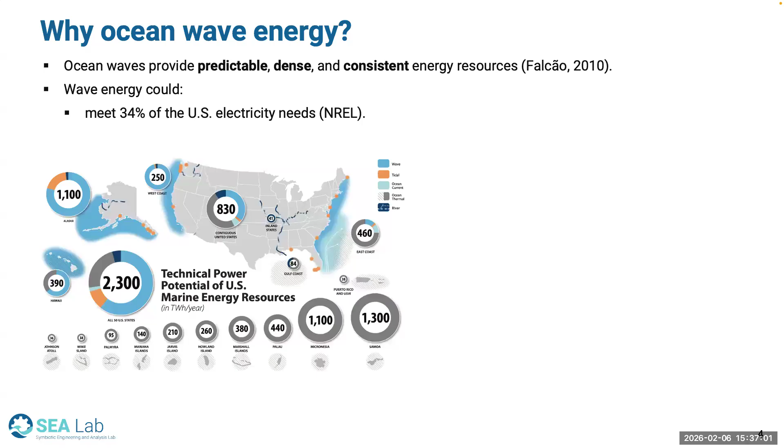What I'm showing is a map of marine energy sources, and the light blue is wave energy, but the others are also things like tidal and river current. And they can be really interesting because wave energy can provide sustainable energy for distributed energy applications, sometimes called blue economy applications. So these are things like instead of sending energy back to the grid, you might use it on site at an offshore location for things like aquaculture farms, recharging underwater vehicles, maybe even doing desalination in disaster resilience response. And so they've really been looked at in that way.

So where is ocean wave energy today? Well, the way that we extract ocean wave energy is using wave energy converters, or WECs, to extract the energy from the motion of the waves. And there's been many advancements in recent years. A company here in the United States called CalWave, they're based out in California. This is their pilot device that they tested in 2022 for 8 months, and it went flawlessly off the coast

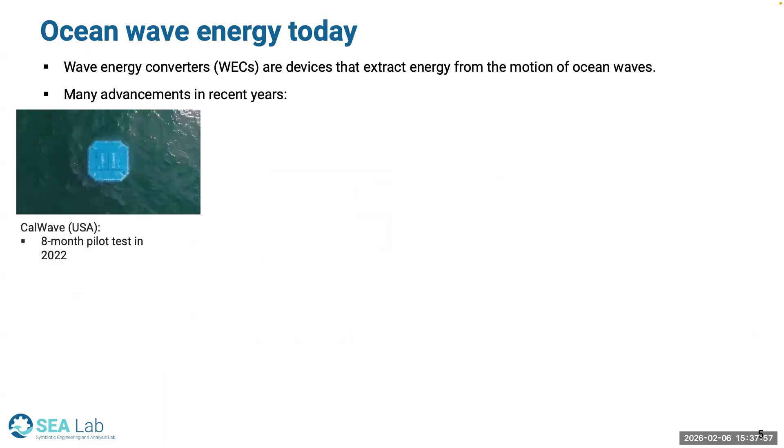of San Diego. This is a developer out in Oregon called OPT, Ocean Power Technologies. This is their pilot device that they tested for a whole year in 2019. And I believe somewhere over here, I think there's like a person. So you can see the scale of some of these devices is quite massive.

Recently opened out in Oregon is a facility called PacWave. This is an open ocean testing facility that was a collaboration with the Department of Energy in Oregon State and a lot of other entities. But the idea is it's going to be a wave energy test bed. Developers can come in, plug their devices into essentially the grid, and test how they perform out in the open ocean. It's going to be able to test up to 20 devices at 20 megawatts total, and it just opened this last year. So you're going to start seeing some of these developers out there.

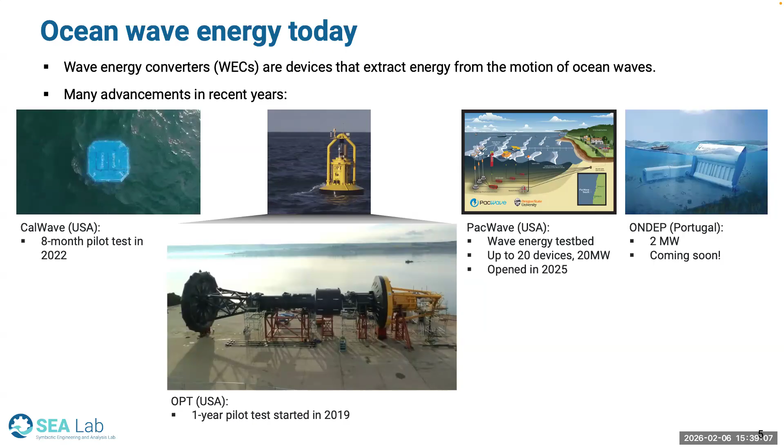As you might imagine, the EU is a little bit ahead of us. So this is a company called ONDEP that's going to actually deploy a commercial scale farm coming soon, 2 megawatt farm of wave energy converters. And then another company called CorPower in the EU, they had their full scale device tested for on the order of 4 or 5 years, and they have a 4 device array coming soon. So these systems are here, and they're really taking off, and folks are exploring all sorts of avenues.

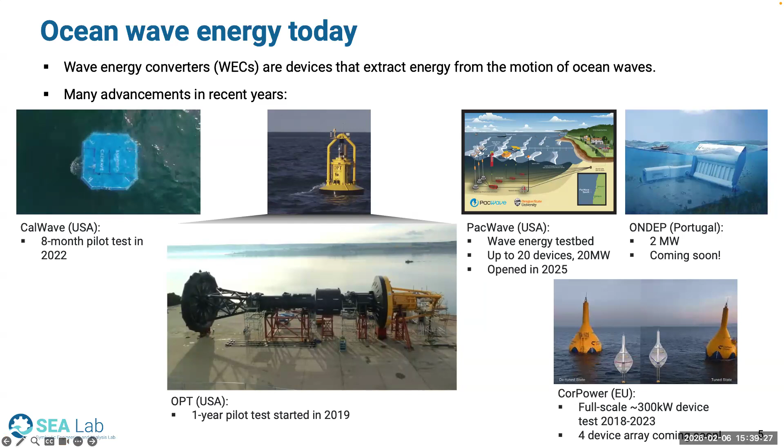But there's a lot of challenges with extracting wave energy. And one of the biggest ones is that it has a high levelized cost of energy. So what I'm showing here are 2 different types of wave energy converters. One is called the reference model 3 that moves in heave. So it extracts energy from the up and down motion that's induced from the waves. And the other is called RM5, reference model 5. It moves like a flap, so it surges when the waves hit it.

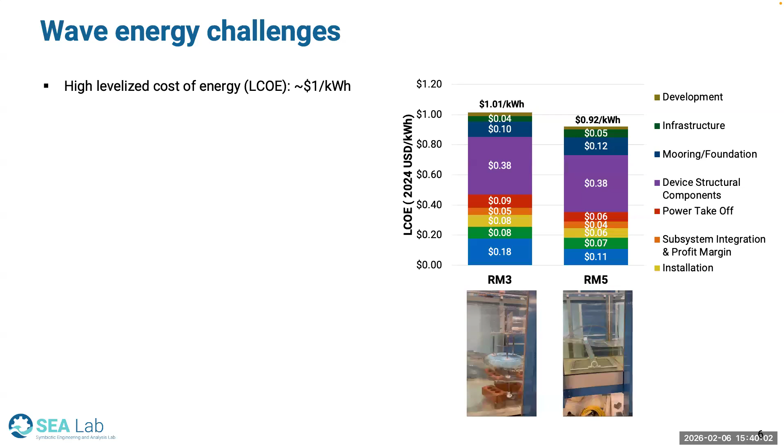And what I'm showing is data from the Department of Energy translated to 2024 dollars. And for both of these devices, their cost estimates come in at about $1 per kilowatt hour. That's extremely high when you compare it to current wind and solar prices. And I believe this also includes offshore wind, which is on the order of 4 cents per kilowatt hour. So if wave energy is ever going to be competitive for grid scale power, there needs to be a lot of cost reductions.

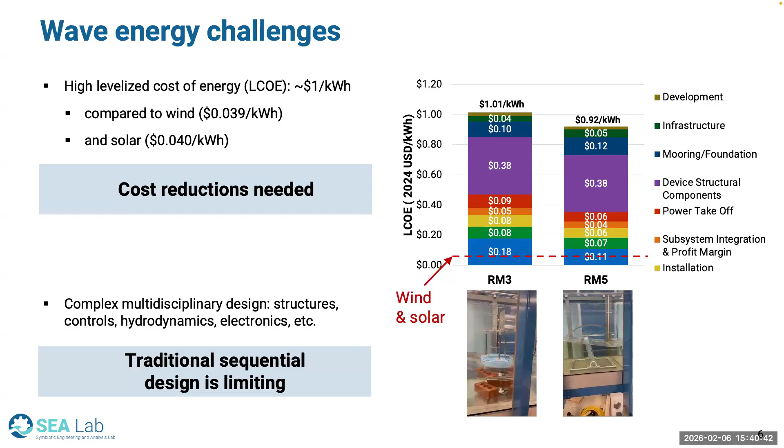What we feel in my group is that these systems are very complex, multidisciplinary design systems. They have interactions between their structures, their control system, their hydrodynamics, and their electronics. And so the traditional sequential design methods that have been used are quite limiting to unlocking their potential.

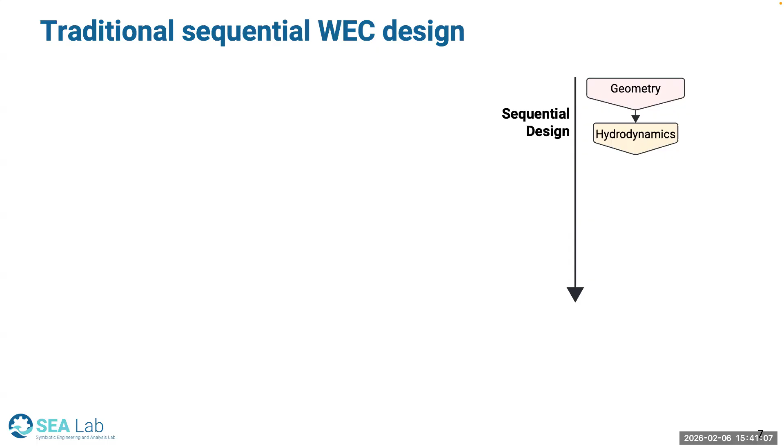If we look at traditional sequential design optimization when it comes to wave energy, usually folks start out with some kind of geometry. So for instance, they might think of a heaving point absorber or an oscillating surge WEC, come up with a general architecture. From there, they analyze the hydrodynamics. How do these devices respond to the ocean waves? Once we understand their response, we usually think about the structures. Okay, how do we design the structures and stiffen them in the appropriate way to handle these wave loads?

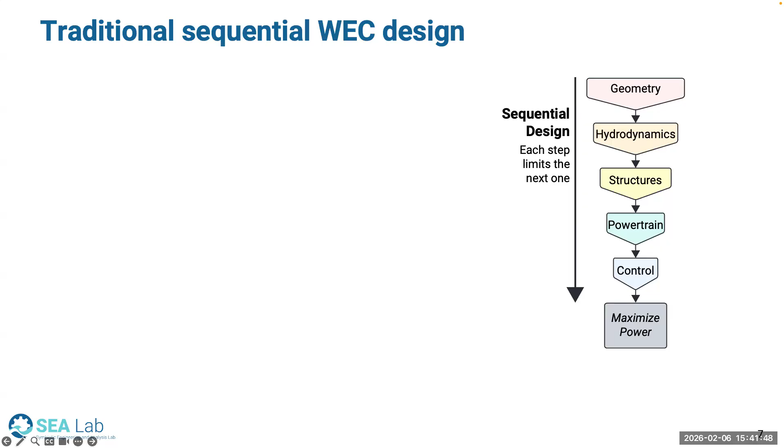And from there, once we can handle the wave loads, how do we extract energy out of them? What does that powertrain need to look like, that transmission system? And finally, control is usually an afterthought. All the way at the end, how do we tune this thing to maximize energy absorption, all with the goal of maximizing power? But what I hope you can see is that each step in this process limits the choices of future disciplines. So your choice of geometry locks you in to some assumptions you have to make about how your device behaves in the waves and its hydrodynamics. From there, you're locked in further into the structures and so on and so forth.

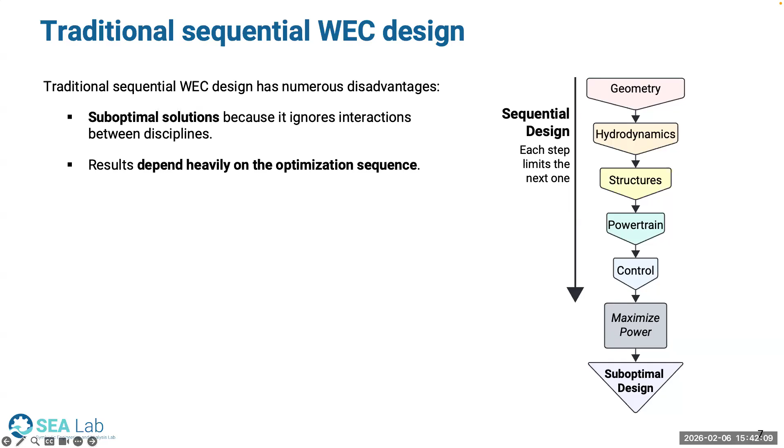So this is why traditional sequential design optimization for wave energy converters has a number of disadvantages. You often lead to suboptimal solutions because you ignore interactions that occur between these disciplines. And the results depend heavily on the optimization sequence. If I had started with another discipline, I will probably get out a different result.

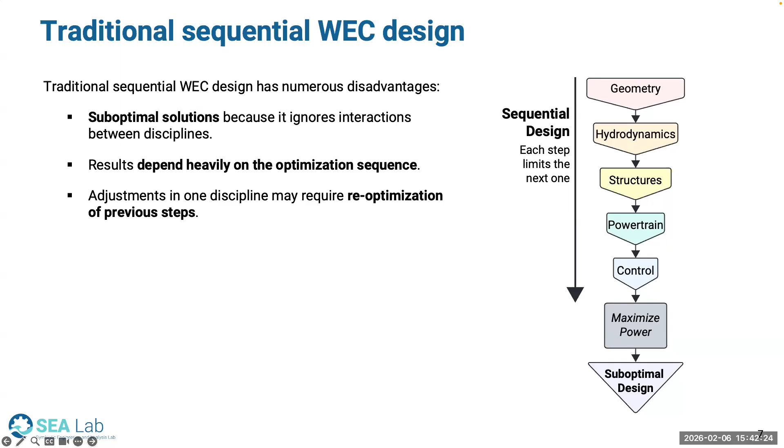And adjustments in one discipline often require re-optimization of previous steps. So it can be very time consuming. This is very challenging for wave energy converters because they're inherently coupled systems. So I'm showing here a simple wave energy converter that can move in heave, so it can move up and down. And it's got some sort of power takeoff system that will convert its motion into something usable like electricity.

If we assume linear potential flow, you can model a wave energy converter very much like a mass spring damper system, where you've got its body acceleration, velocity, and position. And on the right, you have the excitation force of the waves hitting the device that's causing this motion. So the components that go into this when you model it are the mass of the wave energy converter and something called the added mass. This is due to the inertia of the water moving with the wave energy converter.

You also have damping in the system. Some of it is due to the energy radiated as the wave energy converter bobs up and down. It's going to radiate waves. And some of it's due to the powertrain, your PTO damping, usually set by your controller. And there's some amount of stiffness in the system, some amount of hydrostatic stiffness that's due to the general buoyancy of your system that restores it, as well as your controller.

If I color code these, I can color code some of them as red that are related to the geometry and the structures of the device, and some of them as blue that are related to the powertrain and controls of the device. So I already see that these two disciplines are interacting just with a simplified governing equation of the system.

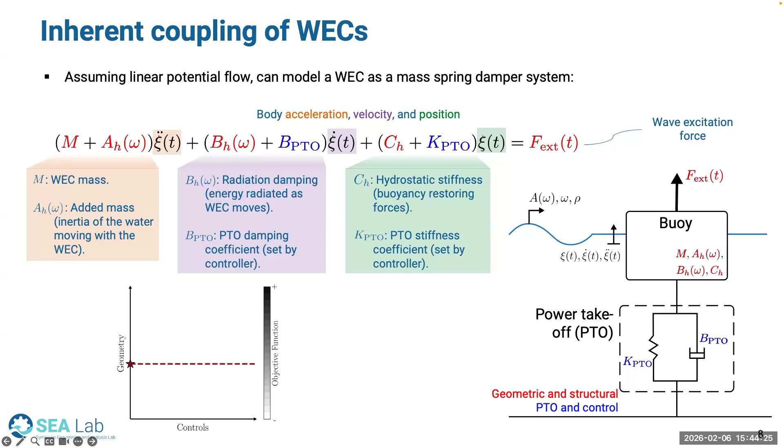Another way to think about it is if I'm looking at the design space of all possible choices in my geometry and all possible choices of my control system, if I optimize the geometry, maybe I might operate in some region here. And then operating on that line, I have to pick a controller to maximize my power. So maybe that looks something like this. And this solution that I achieve at this intersection is actually likely suboptimal.

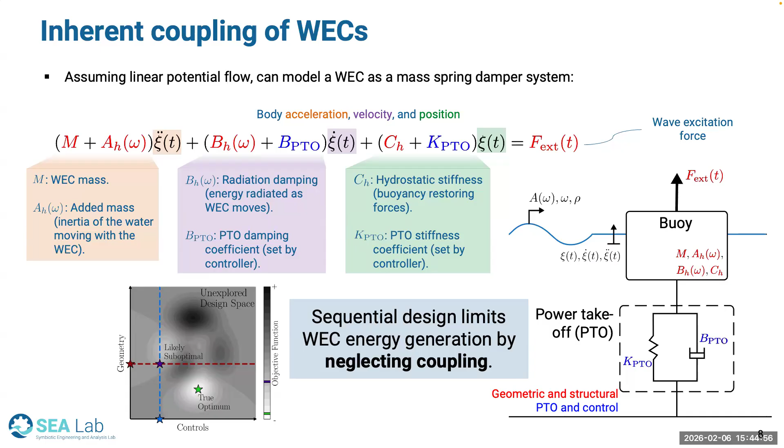If I look at the full design space, here I'm plotting contours of minimizing an objective and maximizing an objective, you can see I've entirely missed this true optimum because I couldn't explore the full design space. So the sequential design that has often been done for wave energy converters really limits its potential due to this neglecting of coupling. And there's coupling in many different disciplines within wave energy converters.

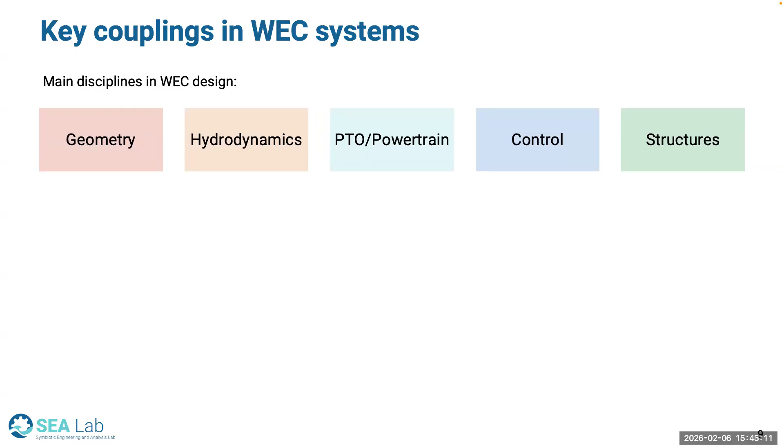Generally, the main disciplines in a wave energy converter are its geometry, its hydrodynamics, its PTO or powertrain, its control, and its structures. Often there's coupling between the hydrodynamics and the PTO. So the hydrodynamic response influences the PTO's ability to extract energy efficiently. And at the same time, the PTO will induce forces on the wave energy converter, impacting its wave radiation.

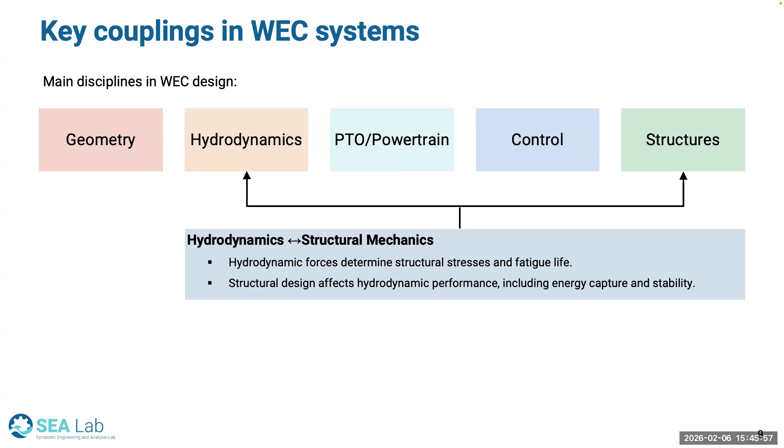You'll have coupling between the control system and the PTO and the hydrodynamics. So your control strategies adjust your PTO settings based on wave conditions, and the control inherently affects the WEC motion and consequently its hydrodynamic and PTO interactions. There's interactions between the hydrodynamics and the structures. So the hydrodynamic forces will determine the structural stresses and fatigue life of your system. And the structural design affects your hydrodynamic performance, including your energy capture and stability.

And finally, the PTO and the structures are very coupled because the PTO generates forces on your structure that you have to be able to handle. But at the same time, the structural compliance of your system may influence the PTO efficiency and its ability to extract energy.

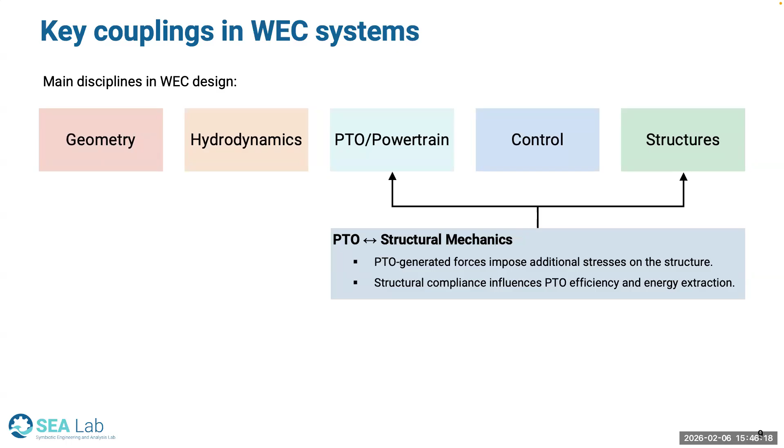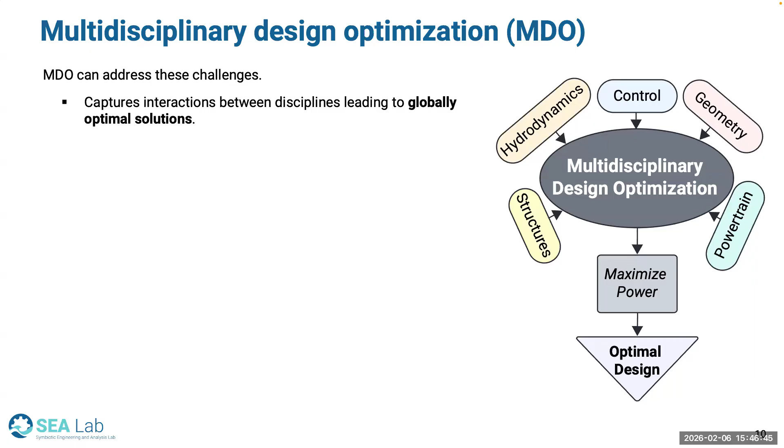We believe in my group that multidisciplinary design optimization can help address these challenges, because the idea with MDO is that it captures the interactions between disciplines simultaneously, leading to eventually globally optimal solutions. So we look at all the disciplines at once with some overarching objective, in this case, maximizing power. And the idea is by considering them simultaneously, we can get to that globally optimal solution. And this simultaneous optimization reduces the need, therefore, of iterative adjustments.

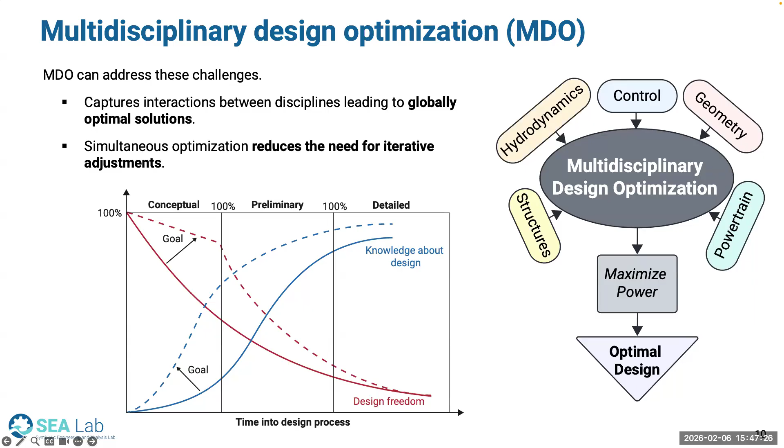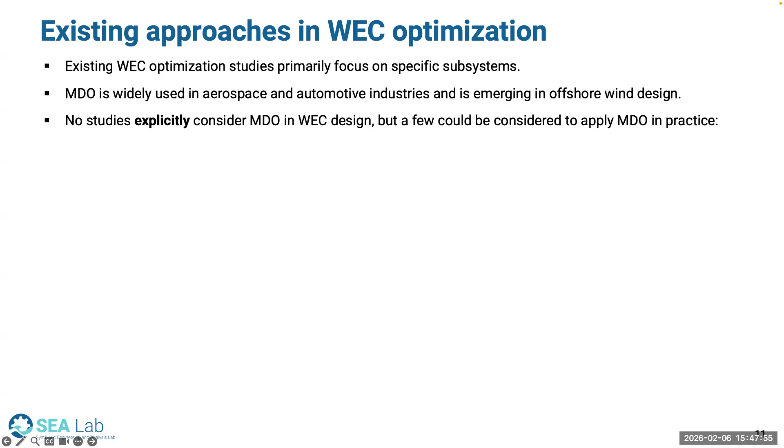There's been work already looking at optimization for wave energy converters. I'm going to highlight some studies. Most of them have primarily focused on specific subsystems, but more recently, people are considering more and more subsystems together. And in general, MDO is used widely in aerospace and automotive industries and is taking off in offshore wind design. And so these studies, they don't explicitly consider MDO, but I see what they do as being MDO in practice.

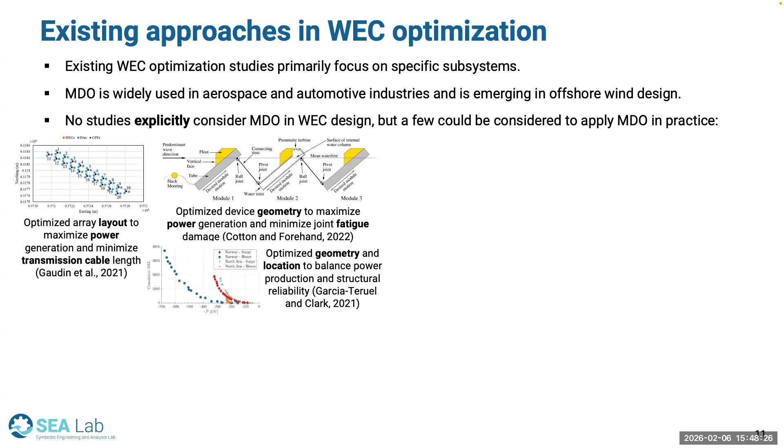So one example was a study that tried to optimize the layout of an array of wave energy converters to maximize power and minimize transmission cable length. So they had disciplines of the location of the devices, they had the transmission cable, and they had power. Another couple ones looked at optimizing device geometry to maximize power and minimize joint fatigue. So structures and geometry were involved, or optimizing geometry and location to balance power production and structural reliability. So again, structures, geometry come into play.

And more recently, there's been a lot of work in a space called control co-design, a subset of MDO, where folks have been trying to co-optimize the geometry and controls to maximize power, co-optimize the PTO controls to maximize electric power, to optimize a flap geometry, its PTO and controls, all to maximize power. So this space of control co-design is really picking up in wave energy.

But all of these studies use non-differentiable, computationally intensive numerical models for their hydrodynamics modeling. And therefore, they end up doing parameter sweeps for optimization, so brute force optimization, because they can't do gradient-based methods, or they use heuristic optimization techniques, which really limits rapid design iteration.

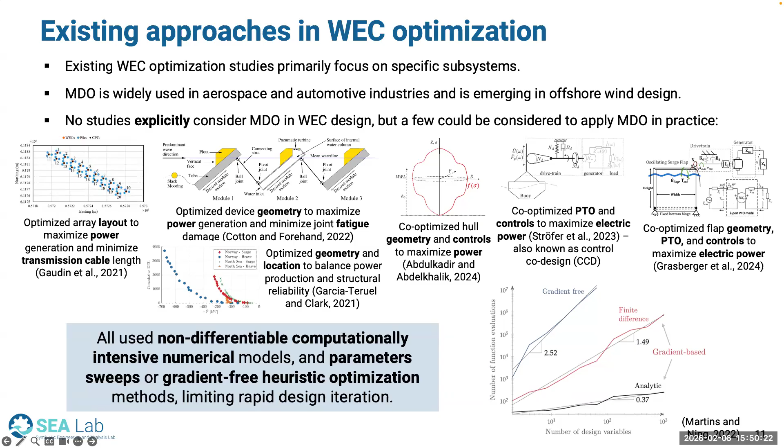So if we're going to look at wave energy converter design in a complex sense, we really need to be in the space where we can be leveraging analytic gradient-based methods for optimization. Otherwise, we're going to be limited in the complexity of our problems. What we found specifically is that hydrodynamics has been the bottleneck for the most part in a lot of these models. So let's talk a little bit about hydrodynamics modeling.

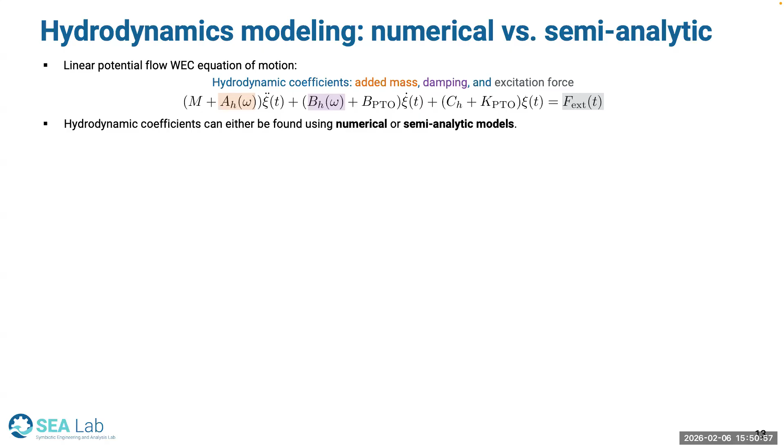So here's that governing equation I mentioned again. And what I've highlighted are what we call the hydrodynamic coefficients. These are the added mass, the damping, and the excitation force on the wave energy converter. There's a couple of different ways that you could compute these. They can either be found numerically or with semi-analytic methods. You can also use CFD, but that's a lot more computationally intensive, so I won't mention that here.

One of the most common numerical methods is the boundary element method, and it solves the problem in the frequency domain. It's faster than CFD and works for any geometry, but it's still computationally challenging and not analytically differentiable. And that's why folks, when they've used it, they've paired it with intensive gradient-free and heuristic methods for optimization.

On the other hand, there are semi-analytic methods. One example is the matched eigenfunction method that we've been expanding in my group. It matches boundary conditions at the interface of fluid domains around the body. And so it's very computationally efficient and analytically differentiable, but it only works for cylindrical geometries right now, and it can't handle wave energy converter arrays. So it requires considerable simplification of geometries and problems if you're going to use it.

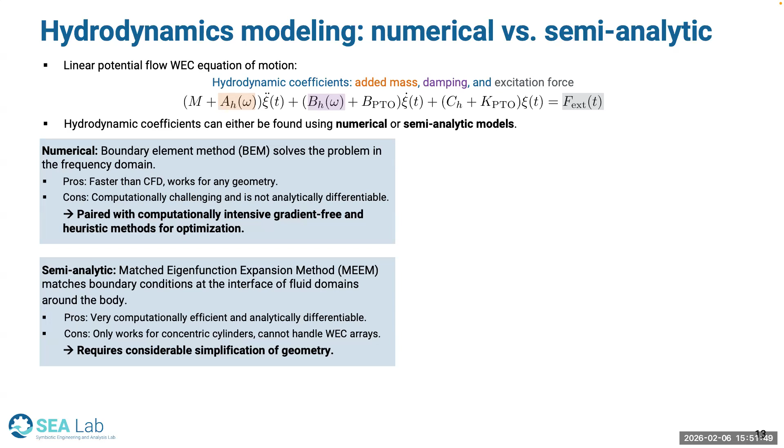But just to highlight how vast the difference is, if I were to do the same hydrodynamic model using these two methods, my semi-analytic method versus my numerical solver, I can get 30 times speed up with my semi-analytic method. So if I can simplify my geometry, that's the way to go.

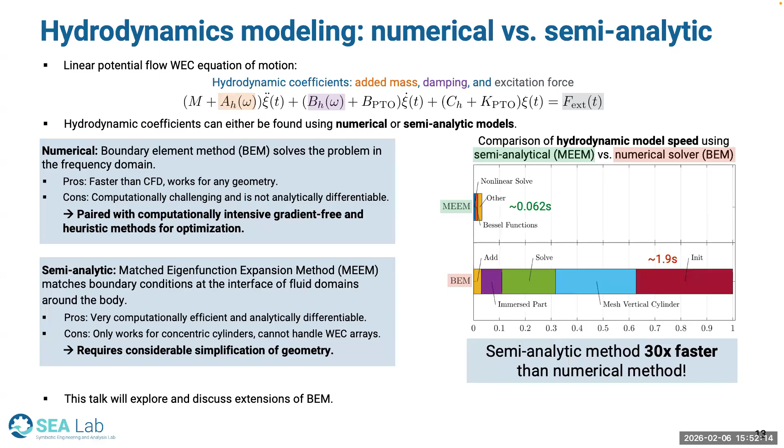What I'm going to focus on in this talk is the boundary element methods that we've been working on that allow us to work with more generalizable geometries. So how is hydrodynamic modeling done in boundary element methods? I'll give you a very quick primer. Instead of solving equations everywhere in the fluid volume, like CFD methods do, boundary element methods only consider them on the boundary. They say it's really just the boundary that has interactions with the waves, so let's see if we can focus on that.

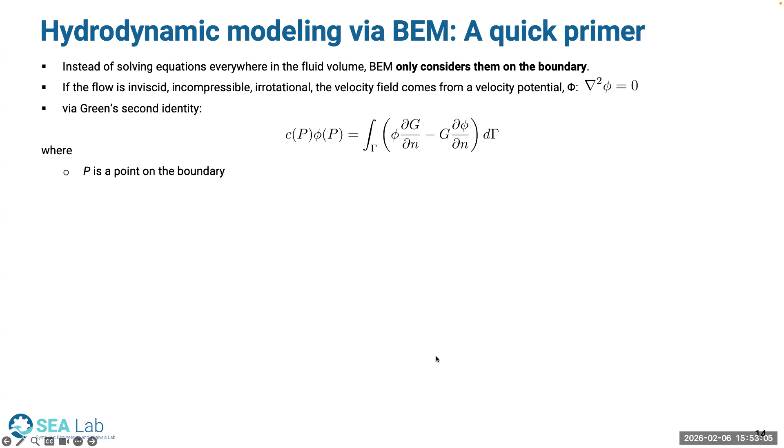And if a flow is inviscid, incompressible, and irrotational, you can simplify things quite a bit because the velocity field comes from a velocity potential. So phi can be written with the Laplace equation it satisfies. And with Green's second identity, we come up with this equation in boundary element methods, where P is some point on the boundary that I'm interested in. C of P depends on the boundary. It's usually 1/2 for smooth geometries.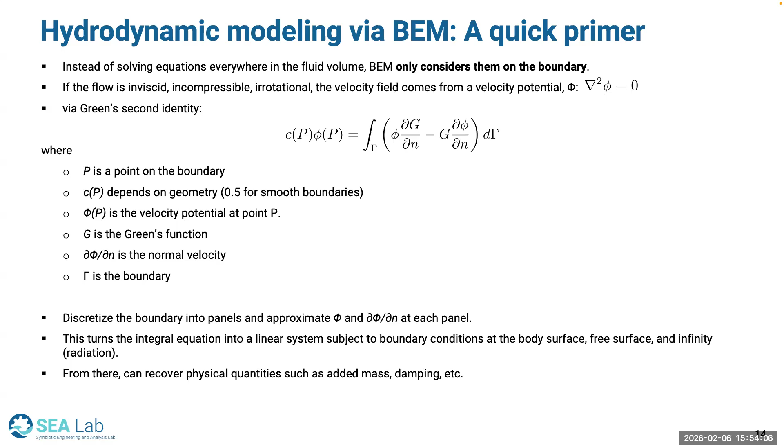And so they're really powerful because they basically transform the 3D problem through the whole domain into a 2D problem along the boundary. And in particular, to solve this integral equation, they come up with complex-valued matrices that are defined throughout the boundary.

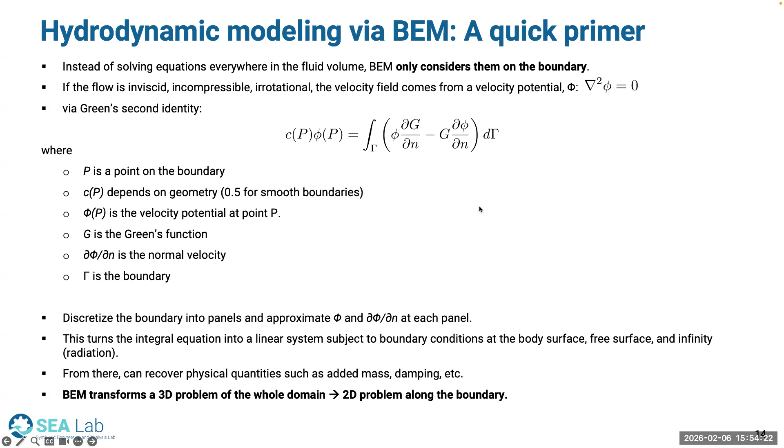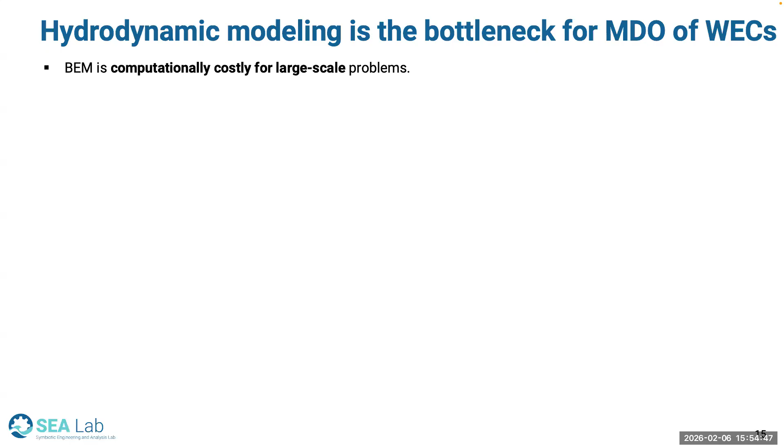So as I mentioned, we found that hydrodynamic modeling is the bottleneck for MDO in wave energy converters. And that's because even though BEM is fast, it's still computationally costly for large scale problems. I mentioned we have to discretize the boundary, so we have some amount of meshing that goes into there. So we have to solve phi at all of those panels.

And when you think about design optimization, you have to run your simulation hundreds or thousands of times. So if I have a simulation model here, some design vectors and some objectives and constraints, my optimization algorithm will wrap around that. So the faster my simulation is, the better chance that I'm going to be successful in optimization.

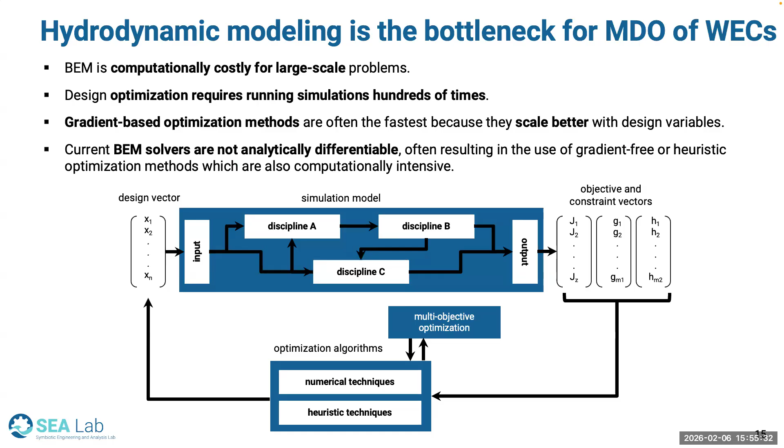Gradient-based optimization methods are often the fastest, as we saw, because they scale better with design variables. But current boundary element method solvers are not analytically differentiable. So it means you can't take analytic gradients and then leverage gradient-based optimization. And folks have either used gradient-free or heuristic optimization, which is computationally intensive.

You could potentially do differentiable programming with existing boundary element solvers by leveraging finite differences. But finite differences can suffer from inefficiencies and truncation errors. So if we were to approximate, let's say, d phi dx, where x is a design variable, using a finite difference, we have to compute phi ahead and behind of some small perturbation h in each input variable.

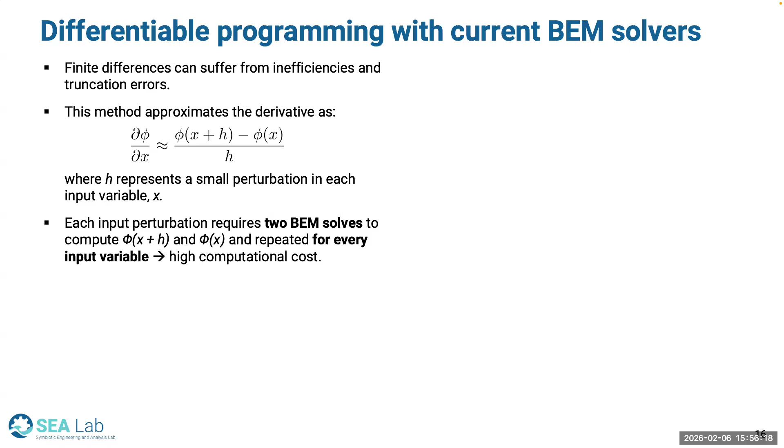And so each input perturbation requires 2 boundary element solves, which is already computationally intensive for large problems. And I have to repeat this for every single input variable x, so every design variable that I care about. So it really scales very poorly computationally.

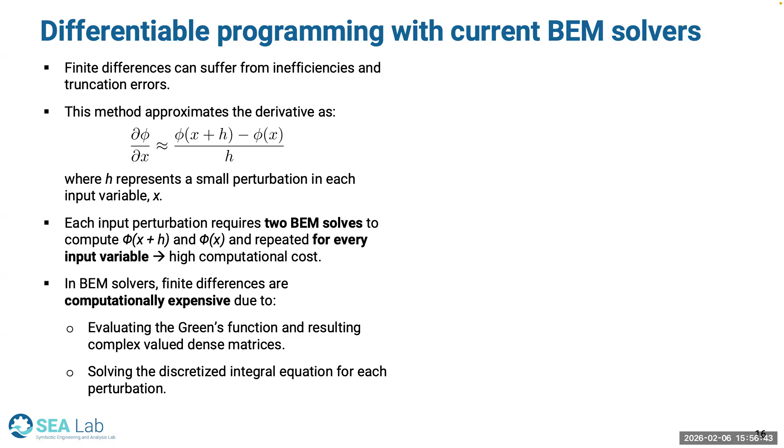And therefore, these finite differences are expensive because every time you solve a boundary element instance, you have to evaluate the Green's function and that integral that I showed before, which has complex-valued dense matrices. And then I have to solve it for each perturbation, every single optimization that I go for. And again, even if I am using finite differences, they don't scale nearly as well as analytical methods.

So that was really the goal in the work that we took on with Sandia: can we create an analytically differentiable boundary element method to solve this hydrodynamics bottleneck?

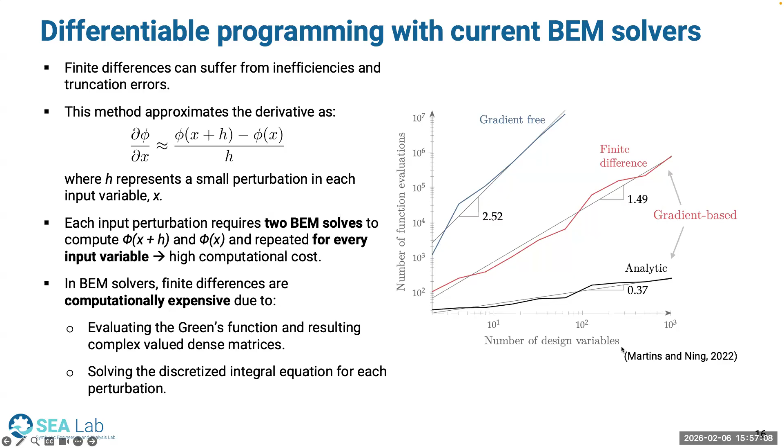It computes those matrices that I mentioned, those complex valued matrices related to the Green's function. It can either use the direct or indirect method for boundary element methods. And it implements both an exact and a surrogate Green's function expression. So there are ways to approximate the Green's function, and you can speed things up a little bit. And we've shown that that still works well for optimization, even as an approximation.

It's 100% in Julia, and that's what really allows us to do this kind of differentiable optimization, because we leverage a lot of the differentiable capabilities in Julia. And we implement the adjoint with automatic differentiation for this.

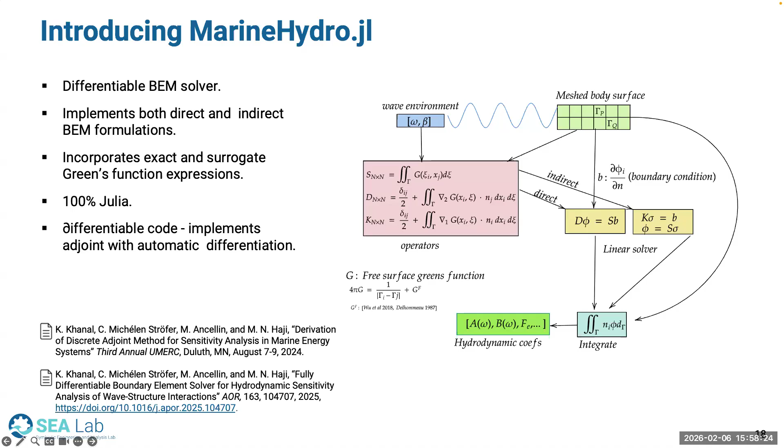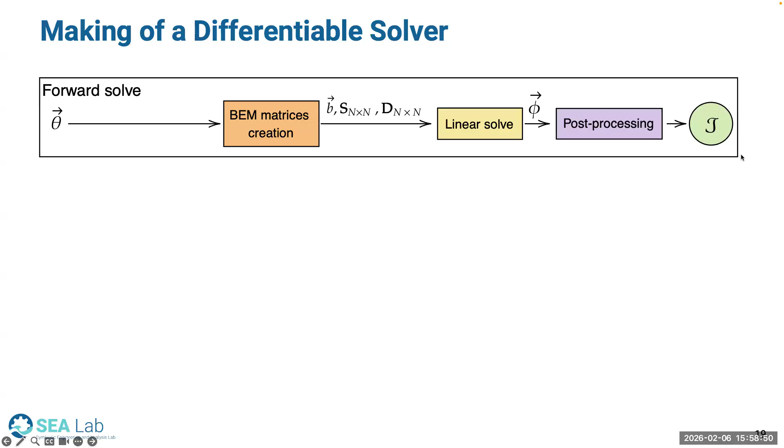But to give you a little bit of a look at how it works under the hood, let's say you've got some design variables that you're interested in, theta. You can input those along with your geometry into the solver. It will compute those complex valued matrices, compute a linear solve, and get your potential. And through post-processing, you can get some sort of objective that you're interested in. So that doesn't work any different than current boundary element methods.

But what really allows us to do more is that every time you assemble these boundary element matrices, we also leverage automatic differentiation so that we can instantly build up a map of these functions and get their sensitivities. We also leverage the adjoint, which I'll talk about in detail in a little bit, to get more of those sensitivities. And that allows you to get the gradients that you care about with respect to those design variables for any objective function.

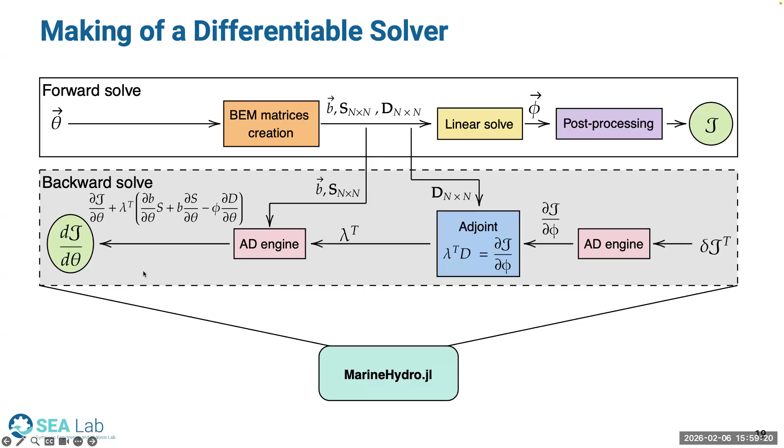So how do we do that? Let's say you have a scalar objective that you care about, like maximizing power in the case of wave energy converters. And it's a function of your potential phi as well as some design variables that you have, theta. It's subject to a constraint.

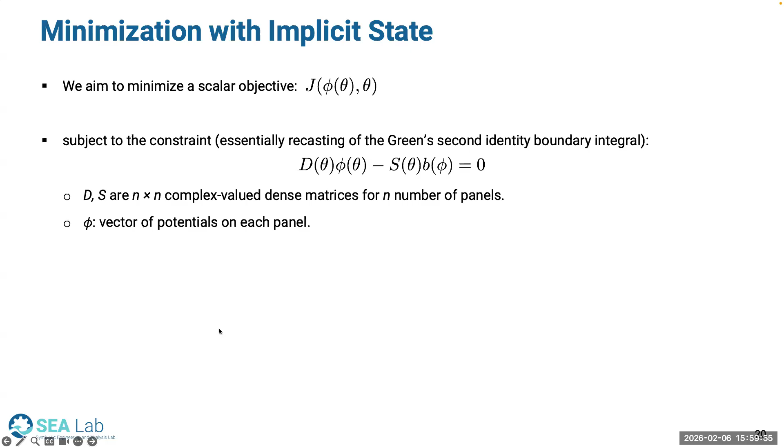So this is essentially recasting that Green's second identity integral I showed, where D and S are complex valued matrices defined at n number of panels. Phi is the vector of potentials on each panel, theta are my design variables, B is just my normal velocity, and J is my objective.

If I were to compute the total derivative of J with respect to theta, I would need to compute this: partial J partial theta, plus partial J partial phi times partial phi partial theta. And it's this partial phi partial theta that's really challenging. This is because theta are my design variables and phi are the potentials at my panels. So it's only defined implicitly via the constraint.

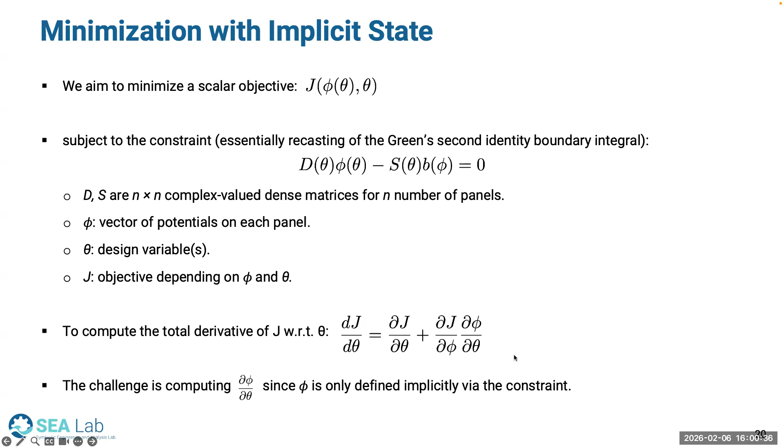And I don't want to compute this if I don't have to, because I have to compute it for every panel, for every design variable. I really don't want to do that. So we can differentiate the constraint applying the product rule. And if I were to rearrange to solve for d phi d theta, I would have to solve this for every single theta on every single panel. And that's computationally expensive. We want to avoid that if we can.

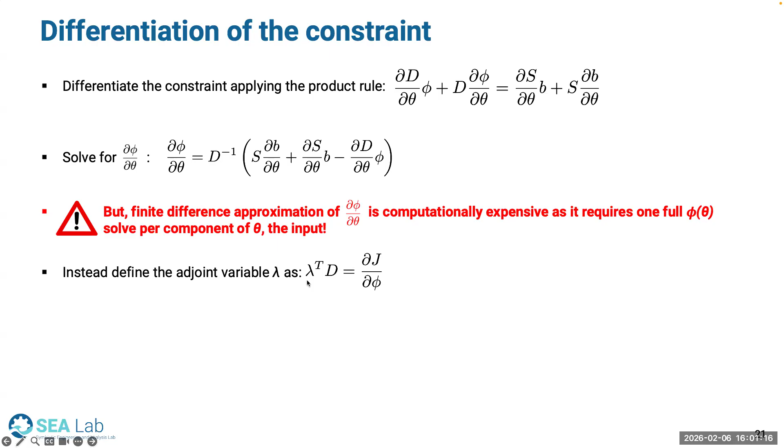So instead, we define something called the adjoint variable. And this is done a lot in aerospace optimization. So lambda is defined by this equation where lambda transpose times that matrix D equals dJ d phi. I can rearrange some things and combine it with the previous equation. And eventually, I can write the total derivative of J with respect to that adjoint variable lambda. And I don't have to compute d phi d theta at all. And that's what I wanted to get away from doing.

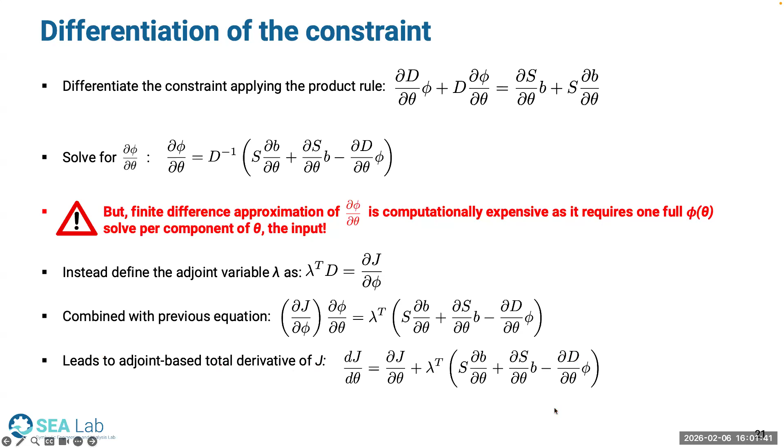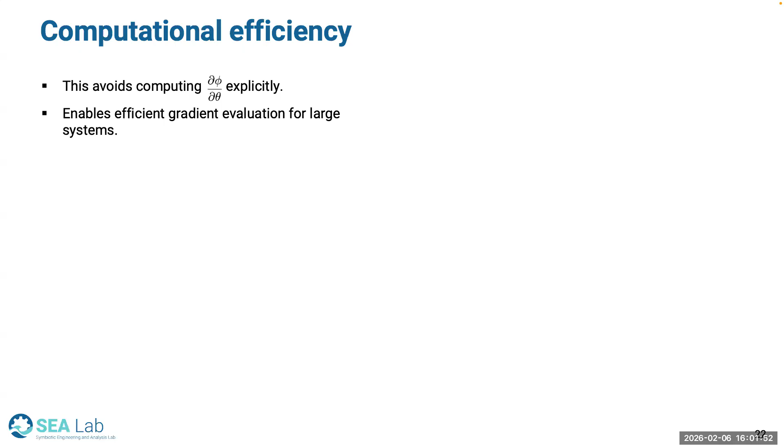By doing the adjoint, this is just one additional linear solve. We can get the derivative of J with respect to theta. So this is very computationally efficient. We avoid computing d phi d theta.

In fact, you can reduce the computational cost even more, where n is the matrix size and m is the number of design variables with this trick. And then we can also use factor-based solvers like LU decompositions to reuse some of our computation and reduce the complexity even more. So the complexity still scales with n, where n is the number of panels. But it's really easy to compute the adjoint matrix. It turns out it's the transpose of our forward matrix D.

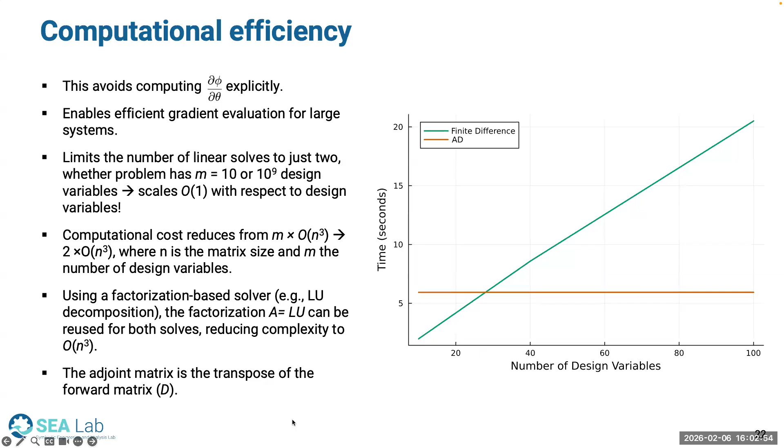So what information can this tell us that we weren't able to get before? Well, I'll just share one example.

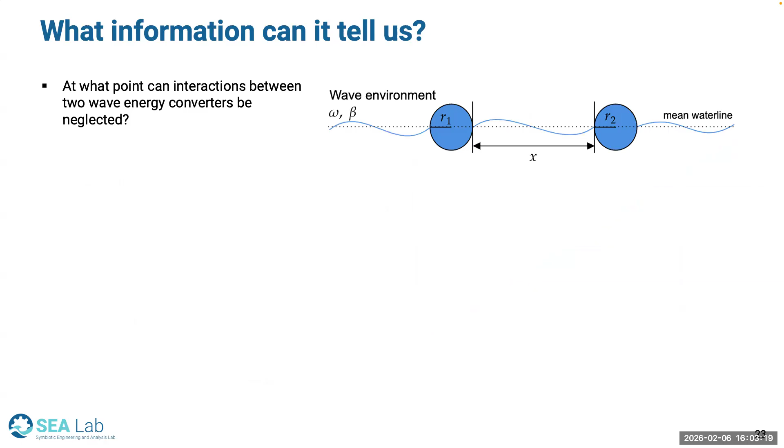One question that often comes up in wave energy design is how close can you place your wave energy converters before you worry about their interactions? Or how far apart do you have to space them such that their wave fields don't interact? Let's say we've got 2 spherical wave energy converters here. Based on some numerical studies in the past, the cutoff distance is typically taken to be about 5 times the characteristic dimension - in this case, about 5 times the radius. And that was just done through numerical studies.

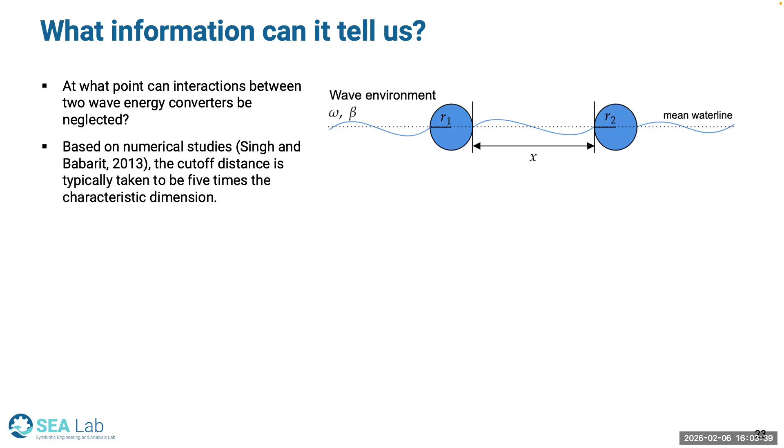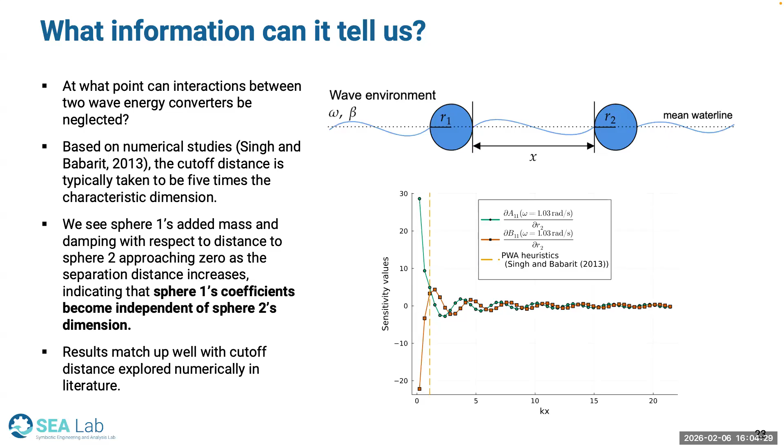So we line up well with existing literature, but we can do so much more now that we have this tool in the space of design optimization.

So how might this fit into not only the physical design optimization, but also optimizing the controller for this system? In wave energy converters, we often call that problem the wave to wire problem. So you might have a design of a wave energy converter. You can compute its hydrodynamics with, let's say, a boundary element model, what we call the wave model. And then for that specific wave energy converter, you can optimize its control trajectory to maximize power.

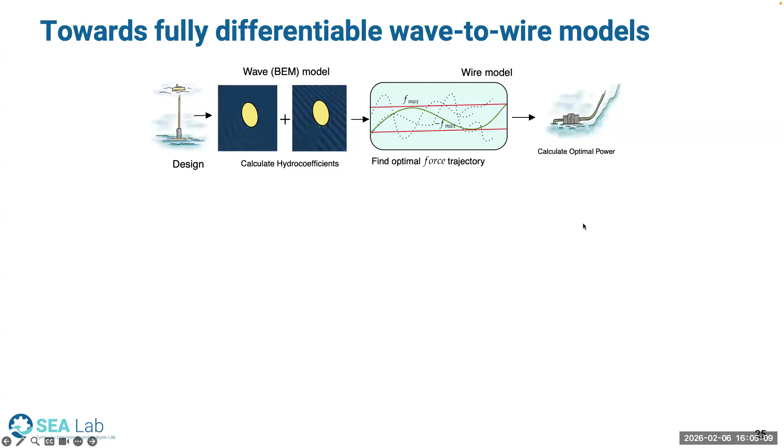You might subject it to some constraints on your PTO, like force saturation. Another way to think about it: I have incoming waves, and I have some design variables that influence the design of my wave energy converter, my absorber. I've got some design variables related to that power transmission, some related to that electrical generator, all with the goal of converting power, let's say, to go to the grid.

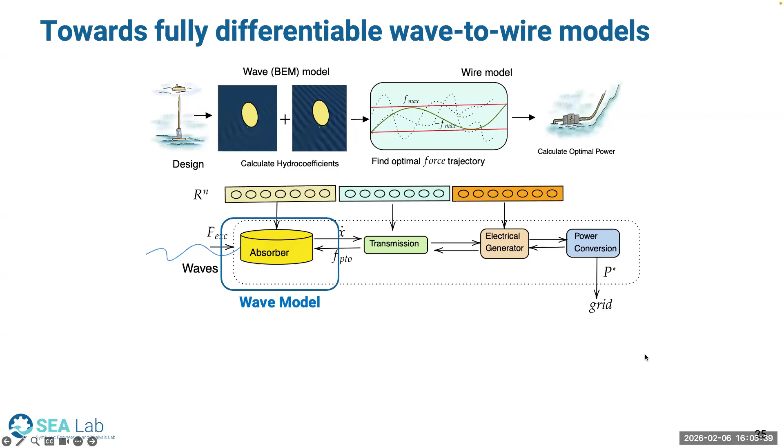So this half of the problem we call the wave problem, which hydrodynamics helps us solve. And this half of the problem we call the wire problem, which is a controls problem. This ends up being a very high dimensional problem. And therefore, we require gradient-based methods if we're going to have any chance of being successful at optimization for the entire system.

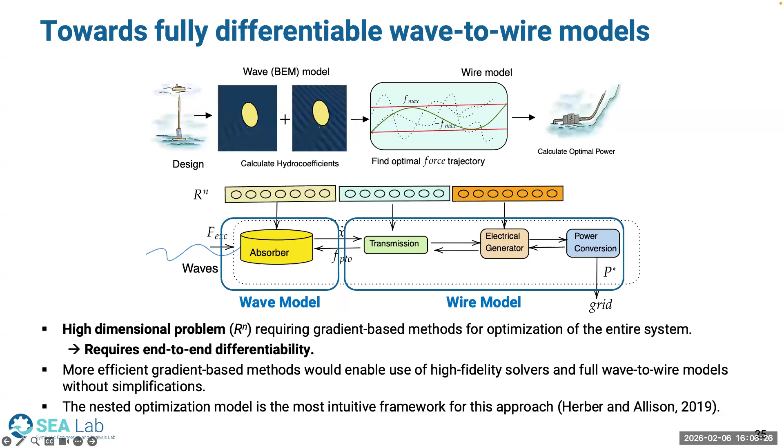Because of that, we really require end-to-end differentiability through the wave model as well as the wire model. So we've surveyed the literature, and we feel that doing this with gradient-based methods would really enable the use of high-fidelity solvers. The nested optimization model is probably the most intuitive for incorporating the wire model with the wave model, and this is some work by Herber and Allison. So what do I mean by a nested formulation?

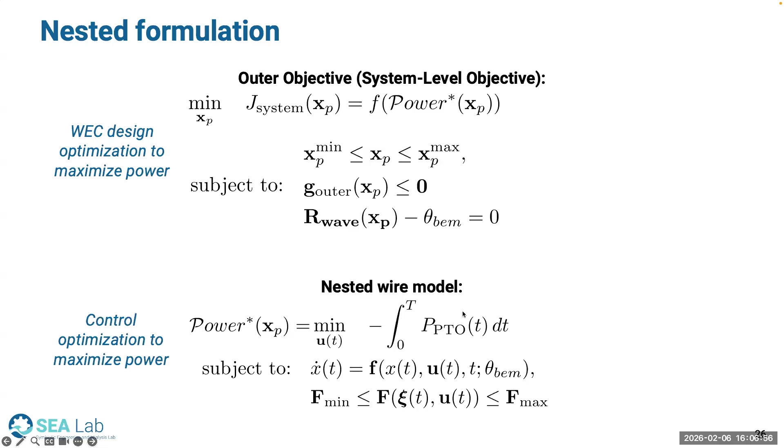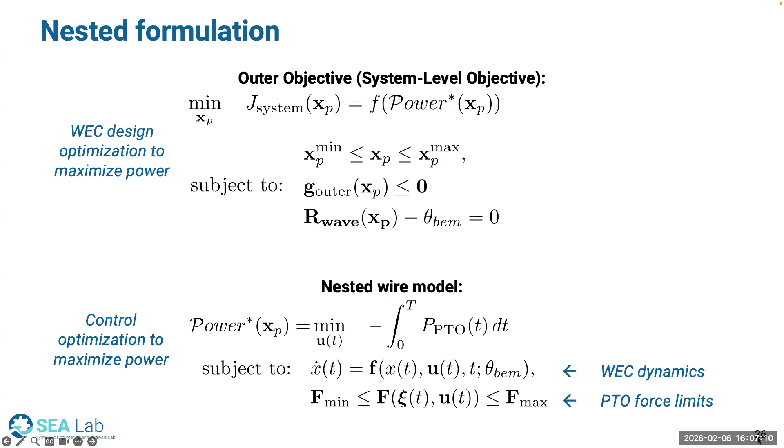So in this case, I have an outer objective, which is basically to optimize my WEC design to maximize some function of power. This could be power per unit volume, or cost with power incorporated, subject to my constraints and solving the boundary element equations. Within that, I have a wire model where I want to optimize control to maximize power, subject to constraints on the WEC dynamics, as well as force limits of the PTO and perhaps other limits that I care about.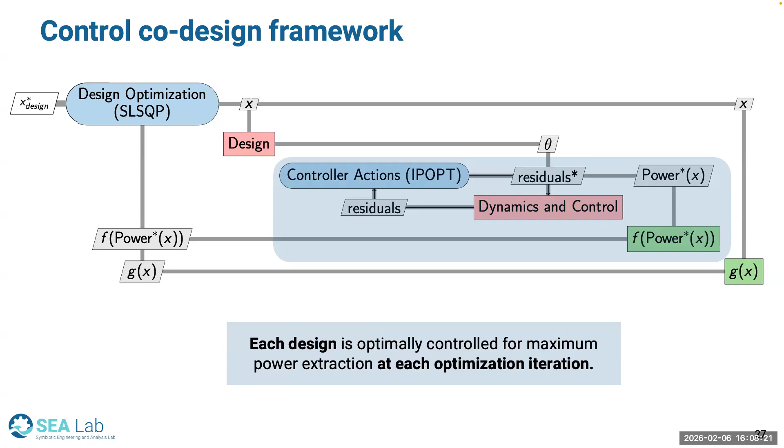So what I want to highlight is that for every design that my optimizer looks at, I have to solve this controls problem for maximizing power extraction. There's a different solution for every single design to maximize power extraction. So at each iteration, I have to solve another optimization problem for the controls aspect.

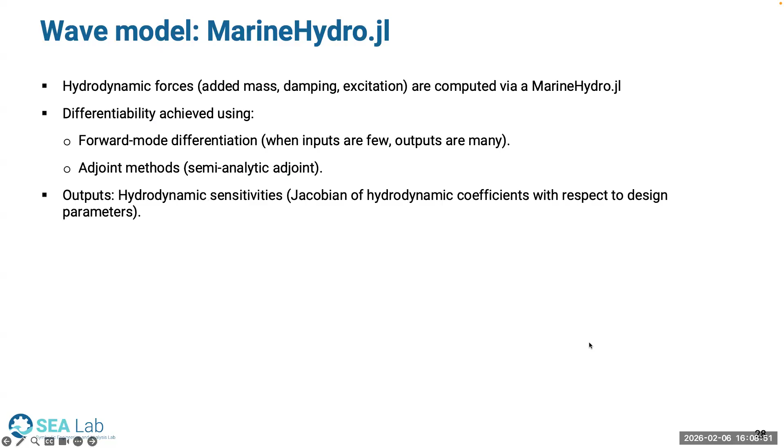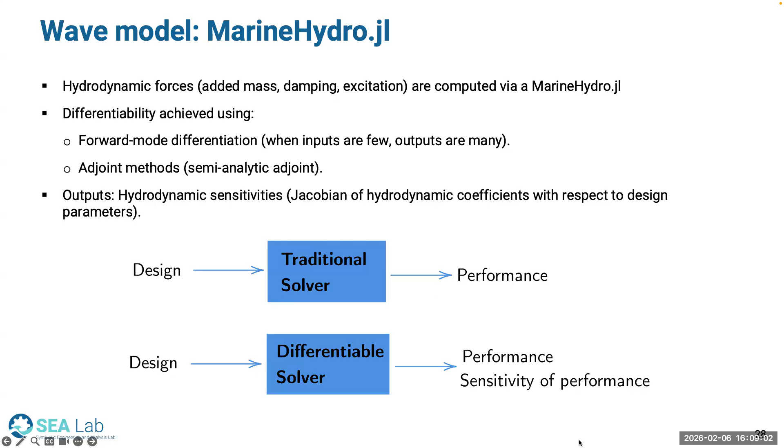For the wave model, I can use MarineHydro. It can give me my hydrodynamic forces and added mass damping. I can have differentiability with it because I can do forward mode differentiation, and I can achieve backward mode differentiation with my adjoint methods. My outputs include the sensitivities of my hydrodynamics to my different design variables. So whereas previously a traditional boundary element solver would just give me my hydrodynamic performance, I can now get my hydrodynamic performance and my sensitivity of performance, so I can use that for gradient-based methods.

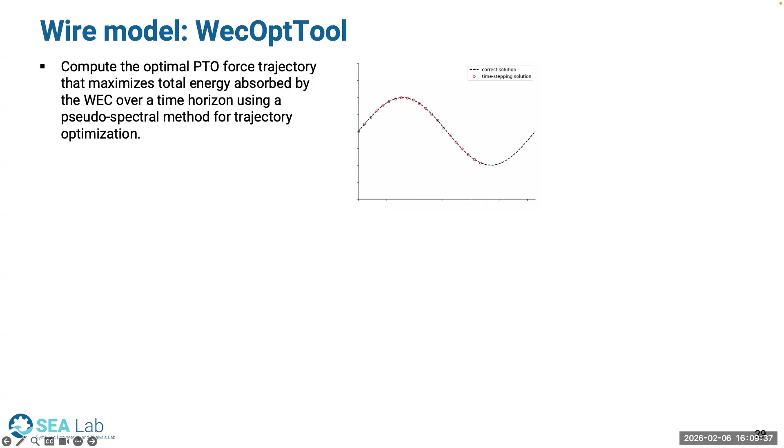For the wire model, we're looking at WecOptTool. It's a toolbox that can compute the optimal PTO force trajectory for wave energy converters by maximizing the total energy absorbed by a wave energy converter over a time horizon. It does this really efficiently using something called the pseudo-spectral method for trajectory optimization. So if a traditional solver would step through time to reach an optimized trajectory for your controller, WecOptTool and the pseudo-spectral method does it basically all at once using basis functions.

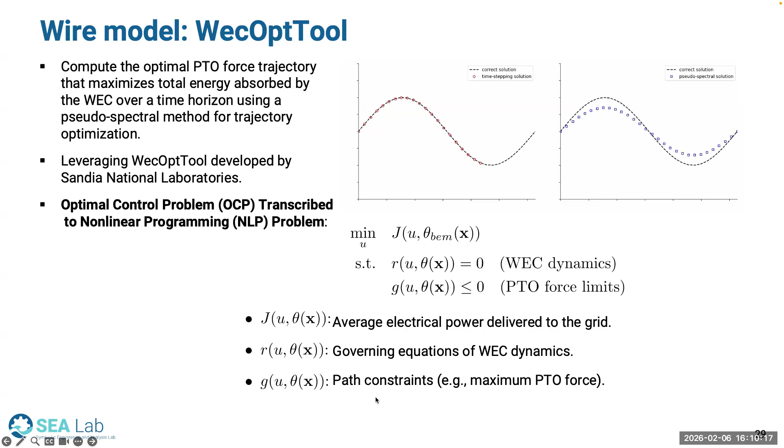This has been developed by Sandia National Labs for wave energy converters. What it basically does is turn the optimal control problem into a nonlinear programming problem that I showed earlier, where now you are minimizing some function subject to WEC dynamics and PTO force limits. That function might be your average power delivered to the grid while considering the governing equations of WECs and any path constraints. This could be maximum PTO force, but it can also be displacement constraints and so forth.

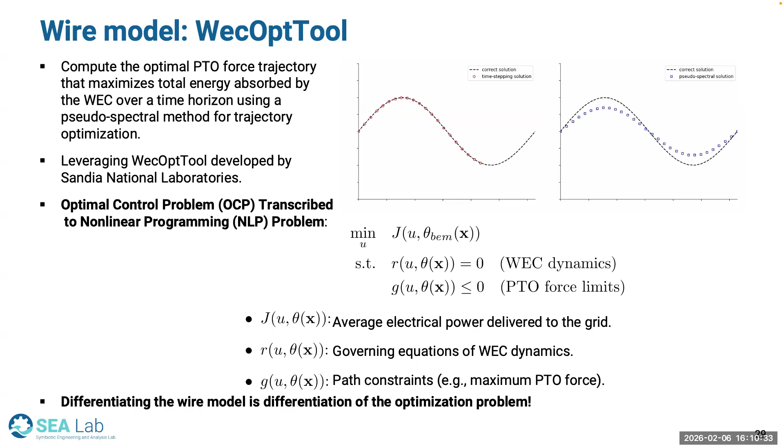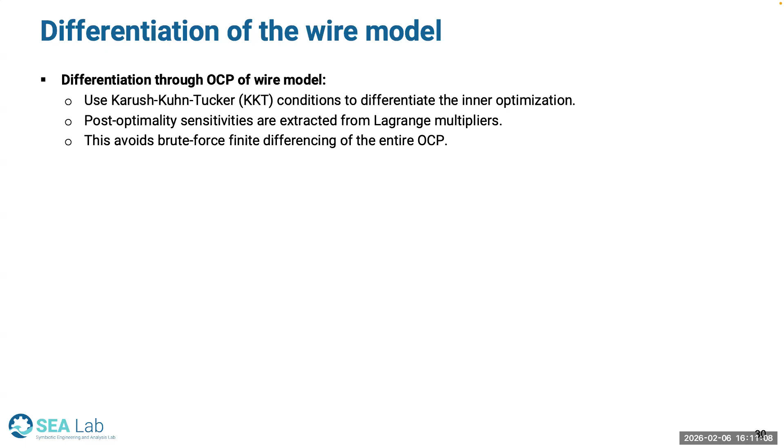So what I want to show here is that if we're going to differentiate the wire model, it's basically differentiating a whole optimization problem in and of itself, and that's a challenge. We're still working on this, but some of the avenues we've been working on is to differentiate through that optimal control problem. We're using the Karush-Kuhn-Tucker conditions to differentiate that inner optimization. We can also extract post-optimality sensitivities using the Lagrange multipliers. In fact, we rewrote WecOptTool to use IPOPT instead of, I believe, SLSQP as an optimizer, because IPOPT gives you the Lagrange multipliers. This can avoid brute force finite differencing of the optimal control problem, because we don't want to do finite differences as they introduce numerical errors.

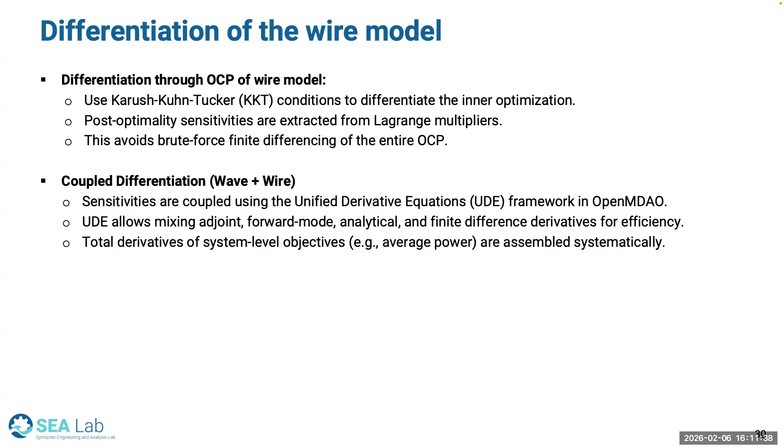Then to couple the wave and wire sensitivities, we can use unified derivative equations. This is basically an extended version of the chain rule, and there's a framework built into a Python package called OpenMDAO that does this. You can mix adjoint, forward mode, analytical, and finite differences for efficiency, and the total derivatives can then be assembled systematically. So it works really well. We think there'll be a lot of simplifications and efficiency gains here by leveraging something from Sobieski.

He was a leader in MDO, where you could evaluate the derivatives of the Lagrangian at the optimum using his estimation method in a way that allows you to avoid second order derivatives in computing your sensitivity. So we've been implementing that.

You can have soft penalties for inequality constraints to keep the optimization differentiable. And then the chain rule assembly really allows for scalability when we're combining derivatives from the wave and wire model.

Some thoughts we've written up in our ASME presentation. This is still a work in progress. This is what Colin has been taking up the mantle of, and hopefully in a future talk, I can share some interesting results.

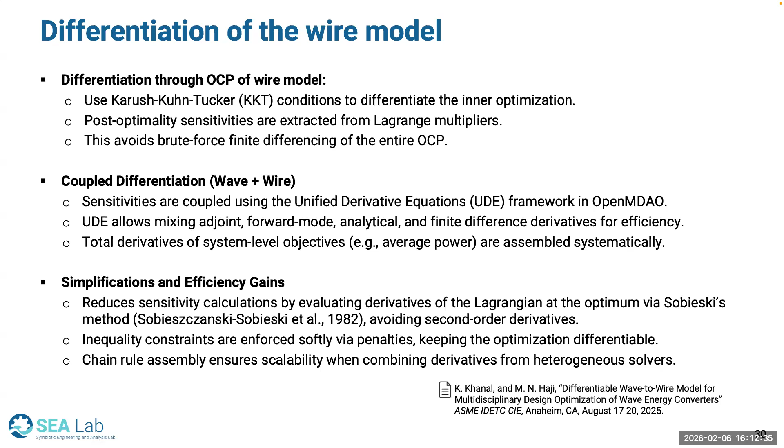There's a method called multiple scattering for hydrodynamic modeling of wave energy converters in arrays. It can use the boundary element method properties, the hydrodynamic properties of a single device, and then interaction theory to compute the forces for the whole farm in a more computationally efficient manner than boundary element methods. So we're looking at trying to develop a differentiable version of multiple scattering so that we could do WEC farm modeling and optimization efficiently.

At the same time, WecOptTool does not scale well with more than a couple of WECs. So we're trying to look at modal decomposition as a way to reduce computation time for the inner wire problem. If we could do that, we think we'll be able to really speed up computation time for both the wave and the wire model part of this.

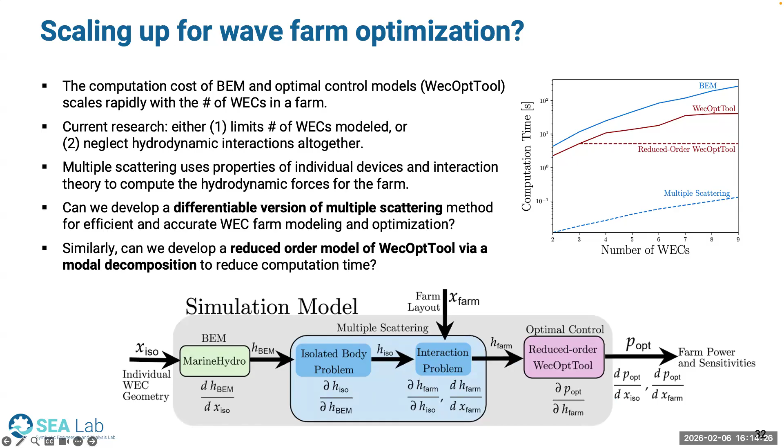What that might all look like together is you might put in your isolated wave energy geometry. MarineHydro would be able to compute that. We would solve the isolated problem and the interaction problem for the farm based on your farm input parameters, and then solve the optimal control problem and eventually be able to do full farm power and sensitivities.

To wrap up, our goal with all of this work is to really drive advances in wave energy converter R&D. There's a great picture from John Ringwood's group at Maynooth from a paper in 2021, showing the R&D topics considered for wave energy converters. In general, the current focus has really been on wave resource assessment, WEC concepts, hydrodynamic modeling, and PTO innovation and control design. These are all concepts in the inner ring.

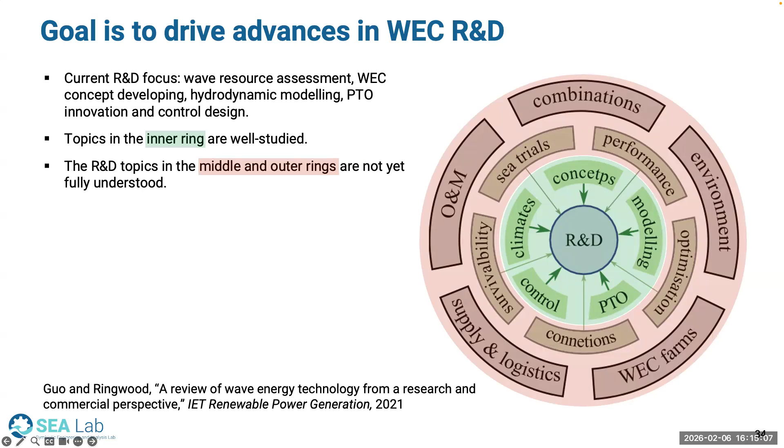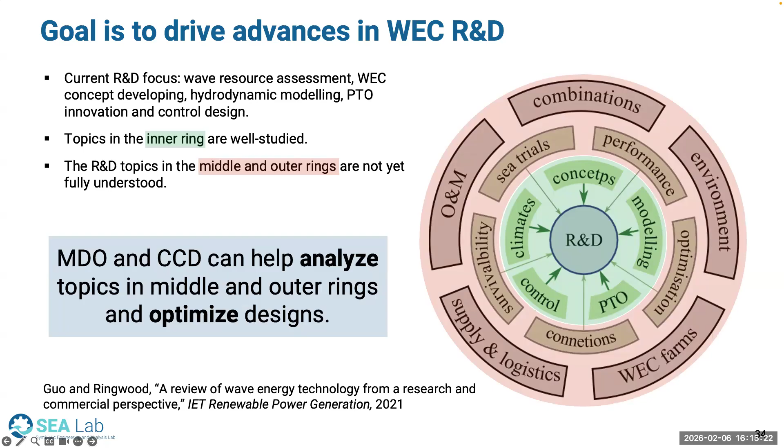All these outer ring topics are still underexplored. We feel these sorts of things like combinations, optimization, survivability, WEC farms, we think all of this is really going to need to leverage things like MDO or CCD, control co-design, to help us analyze those topics and optimize designs. So with that, I'm happy to take any questions.